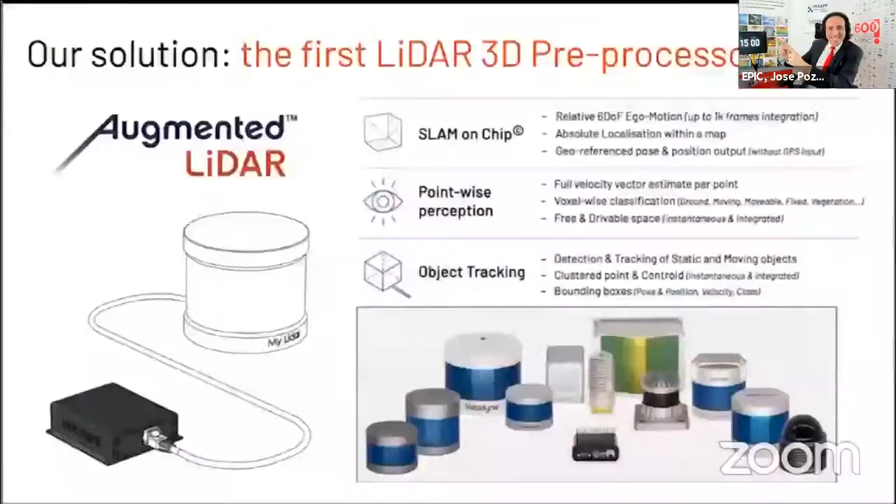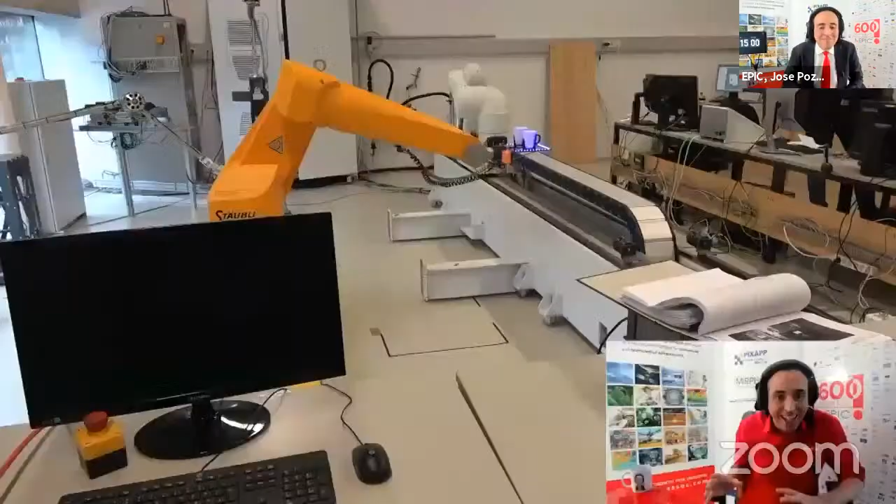Yes, we had several epic meetings looking at what sensors could do for robotics. Some great companies have come forward to say what has to happen over the next 3 years, but we can do so much more this year. Seeing from the perspective of the robotic industry, it's all about precision and speed. Robots often need to observe things in motion and react with ultra-fast photonic speed.

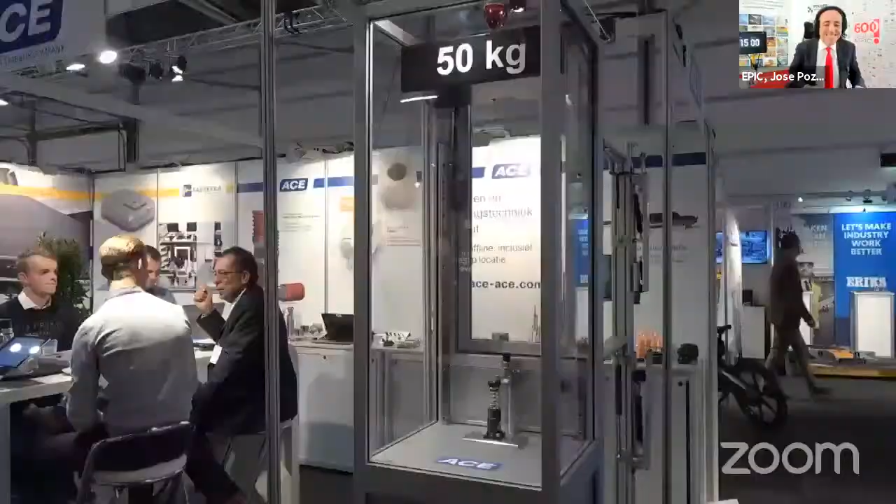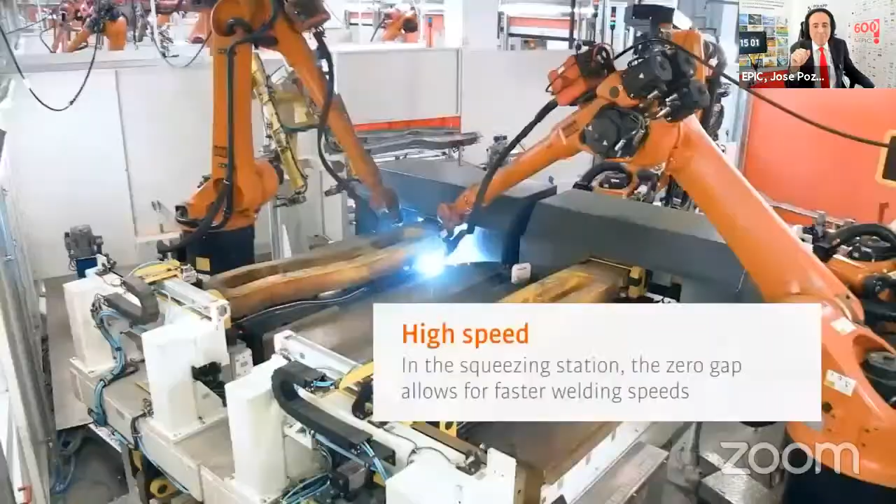I remember walking around precision tool exhibitions and thinking, suppose that robot arm from ABB was equipped with 3D sensing, or what could German giant KUKA do for the automotive sector if smart hyperspectral cameras were included? In our meeting on the 1st of February, why don't we ask DEMCON about their vision needs in robotics and then match them with the cameras of Roboception.

Look at this. Stereo cameras remind me of one of the most glorious sci-fi movies of the 80s. Check out my VIP list: Epson or Yaskawa in Semicon, TransEnterix in medical, Boston Dynamics in security, or Amazon in logistics. So let's connect with robotic companies on February 1st at 3 p.m. Sign up for the Zoom room or watch live or later at the Epic YouTube channel.

I was acting at the end of the video. I am never tired, I don't sleep, I only live out of photonics. It was really a lot of work, a lot of work from Dr. Francesca Moglia to put together such a list of companies.

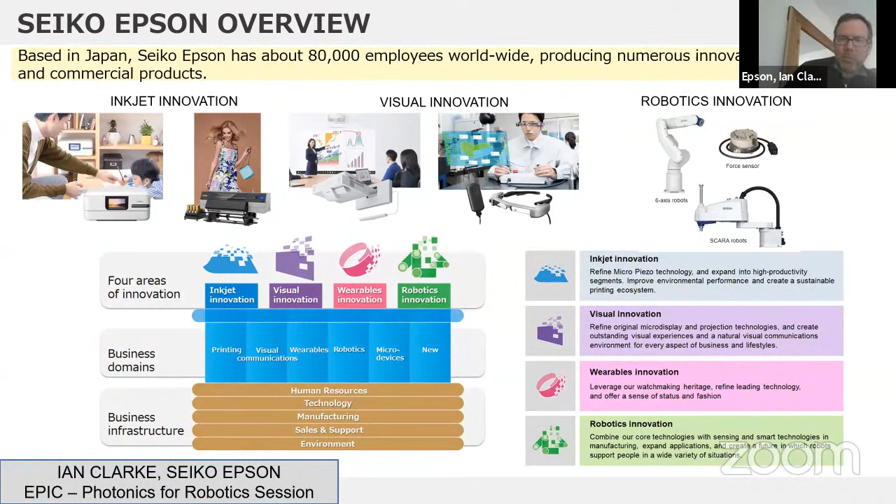So R&D in Toronto - we're mainly on the software side, and of course, as is trendy and fashionable, working a lot with machine learning, machine vision, and adding those sort of skills to the robot line. We're basically focused on industrial applications, that's Epson's main area right now. But on the R&D side, we're trying to look beyond that. And I thought for today, with the European Photonics Industry Consortium, it would be best to talk about how we want to use the skills going forward to try and create some new value.

So basically what we're focusing on in this particular area is to add a lot of sensors, mainly vision sensors, but force sensors as well. And of course, machine learning to try and expand what one might say a robot can do to more of a skilled concept.

So the main idea here is that as opposed to just being able to detect one object and then manipulate that object and perform one task of one particular type, we want to train the robot to have a skill in that sort of area, so it can detect and manipulate and perform tasks of a variety or of a decent variability. Basically trying to expand the concept of hard coding the robot to do one particular thing, to it having a skill in grasping and manipulation, whether it be pick and place or pick and insert or any task that you might want.

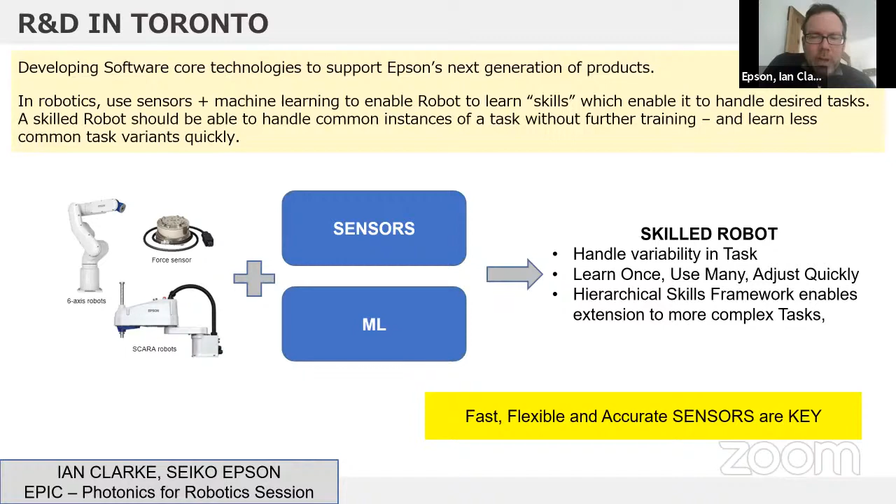But the idea is to build up the robotic skills to open up new possibilities. The idea with this is that you want to train the skill at design time so that you can then apply that skill in many different applications, and be able to adjust quickly for particular environments or skills or tasks required at the customer site. And of course, as is the main point today, the key to all that is fast, flexible, and accurate sensors. So that's what I wanted to talk a little bit about, what our needs are in this area.

So currently, we're using a lot of RGB, RGBD, 3D cameras, both on the robot arm and also statically mounted. And of course, that leads to a real variety of conditions, angles that things are being viewed at, environments that are being viewed from. And that leads to a very high bar for what we really want out of the sensors that we're using. Of course, we want to be able to control the light sources that we're using.

It'd be nice to be able to control the projected pattern for the 3D cameras, to be able to tune that pattern to the specific environment and object that we're doing. Accuracy - a lot of times the 3D cameras that we've seen are tested on more of a flat surface. But at the end of the day, what we really want are the edges and the corners, to be able to preserve the 3D shape that we're looking at, both the smoothness of the shape, the 2D, 3D edges. We also need to be able to preserve the holes, the complexity of a shape that we're looking at.

And to help with all this, we'd like to be able to support reinforcement learning and machine learning policies on the hardware of the camera for speed reasons. Probably the one thing I'd like to dwell on a little bit more today is the interface - meaning we see a lot of literature, a lot of products offering sort of auto-tuning solutions and the ability to tune, but in the end, the level at which we can do the auto-tuning, can we be able to specify target features like edges or holes or things that we say we want to be able to see this or see that?

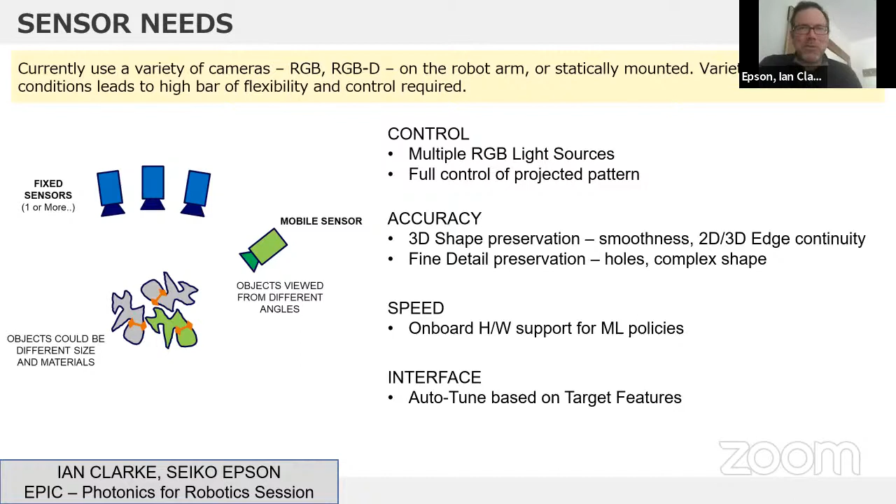And with that, I think my time is probably pretty much up. So I apologize for the very speedy and brief overview, but I'll leave it there. Thank you very much for allowing me to give this brief overview of what we're doing in the Toronto office, and I look forward to talking with you.

Thank you. Thanks a lot, Ian. That was exactly what we asked for, you put also your wish list. That is good. Maybe it's not really detailed, because what's interesting for us is you mentioned what you have so far isn't satisfying you completely. Can you give a more specific example of what is not really working properly that you'd like addressed for the future?

Yeah, we'd like not just a solution for today, but a solution to think about for tomorrow too. Good choices.

So, to talk a bit more about what's not working for us today: most of the things come down to, as we know, starting to look at it from a 3D perspective. So with a mobile camera, you're looking at it from different angles. Of course there's reflectance and lighting, all the usual problems that come up, and how to dynamically adjust to that.

But the main thing is, when we're doing the auto-tuning, as opposed to having an expert say okay, this is what I'm looking for, this is how to tune it, we want to be able to automatically learn that based on what the task or algorithm downstream is looking for. So a higher level of...

...semantic meaning. So if I want to look for edges or specific features, can I specify that and say, here's what I want to see in the scene? Can the camera system then adjust and tune to that? In other words, the interface between the algorithm, the application, and the sensor—could we have a slightly richer, higher level interface between those two components?

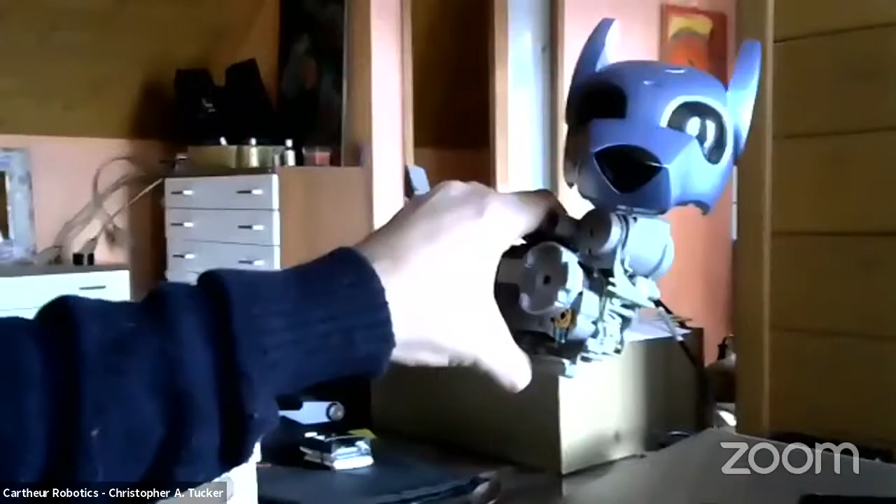Oh, can you move the camera? Oh yeah, I guess I will. Over here, I can't even see what I'm doing now. Yeah, show us. There, we got some parts over here, maybe you guys recognize what that is. Oh my god, I'm a huge Isaac Asimov fan. These guys, whenever I... this is one of the people developing the personalities. Where's the camera going? Oh my god. Well, there's stuff everywhere, I'm quite a mess, but the wife seems to tolerate it.

Christopher, on your YouTube channel you talk with your robots, that's something I really admire. When we are here looking to connect software with robotics companies and enable photonics technologies, there are many companies who will want to follow with you. I just want to say welcome to this, please continue asking questions, and thank you for being here. I'm a fan, thank you very much.

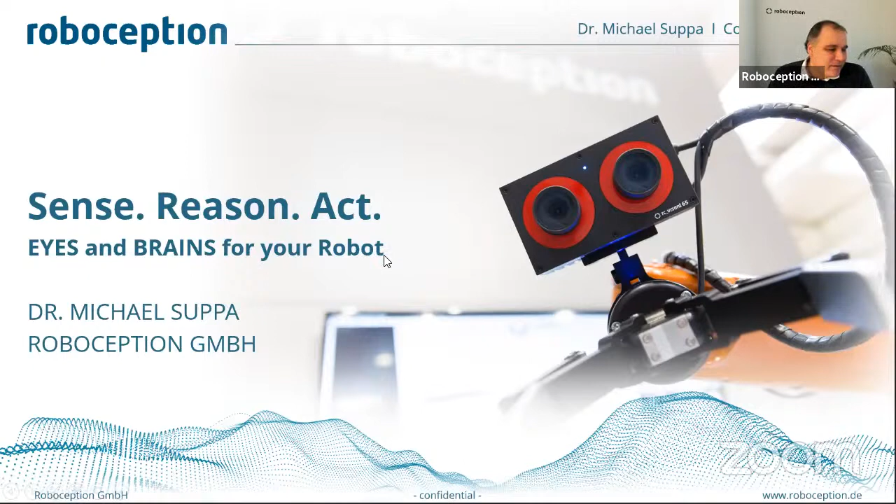Basically, what is our challenge? In most industrial production, for now, we have standard approaches. We have the world ideally known, and the robots doing the same things all the time. But most people are looking at the moment for versatile plants, so basically they want varying products, varying processes. It can be that the human is interfering, so work pieces are at different positions. And somehow the robot has to be able to perceive that.

And this is where we are proposing that 3D vision, mostly stereo imaging, really helps in combination with machine learning and applied AI to solve this flexible task, because only 3D vision gives you the scale that you need when you have varying workpiece to robot and end effector positions. Usually that's the question here. And the task we are talking about, especially in logistics where you have no knowledge about the objects, and in machine tending, which can be on a mobile base or with a stationary robot, you always have to refer the robot to the workpiece, to the workstation. This is what can be done with 3D vision.

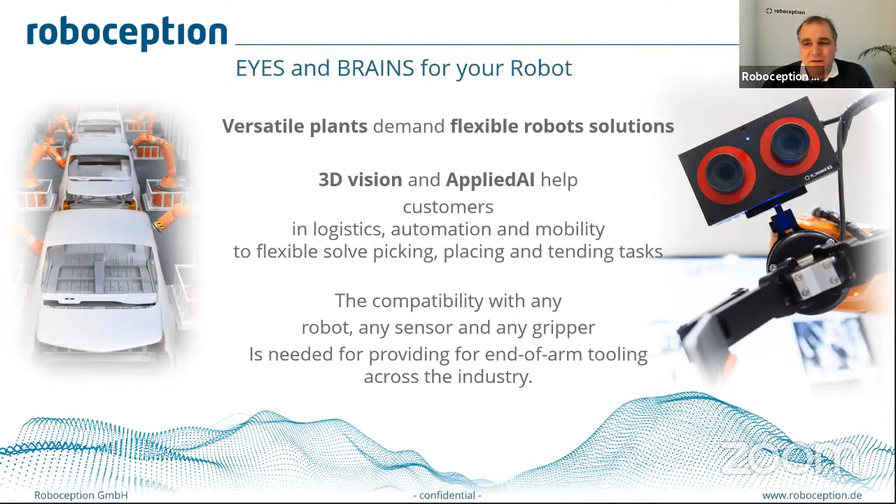In addition to that, you have a multiple variety of robots on the one hand, and a lot of grippers. And the task, same as for the human, is actually solved in between the eye and the hand. The question is, how do we really get this eye-to-hand relation for multiple tools and multiple robots? This is what I will introduce a little bit in the following.

It was nice that Ian mentioned it. He said he wanted to compute something on the camera, and this is what we are actually offering. Our stereo-based system includes an NVIDIA GPU, so we can actually run algorithms on board of the camera that really reduces the latency, because we are directly coupled to the camera chips on our system. So the rc_visard, you can see here, comes at two different baselines. Usually from a stereo system, the baseline decides the optimal distance in between the camera and the workpiece.

We are offering two versions for mounting it on the robot, with small baseline and wider baseline, as well as mounting it as an external camera. You can compute on board, and what we usually deliver to customers is not the image but the object location, the grasp point, and other high-level information, because we can compute everything in between on board of our camera.

So we have the possibility to detect AprilTags, QR codes. We have a SLAM module for mobile systems. Item Pick is a tool for logistics where you know nothing about the objects to pick, just that it's in a mixed bin and you have to find it with your suction device. Box Pick is for palletizing and depalletizing, and Silhouette Match and CAD Match are for machine tending, because in machine tending you need an accurate placement position.

In logistics, it's pick and drop, so you need to know an unknown part, pick it, place it and drop it. For industrial automation, you usually have an exact CAD model of the part, and you need to place it accurately. On top of that, we use machine learning to give us generality.

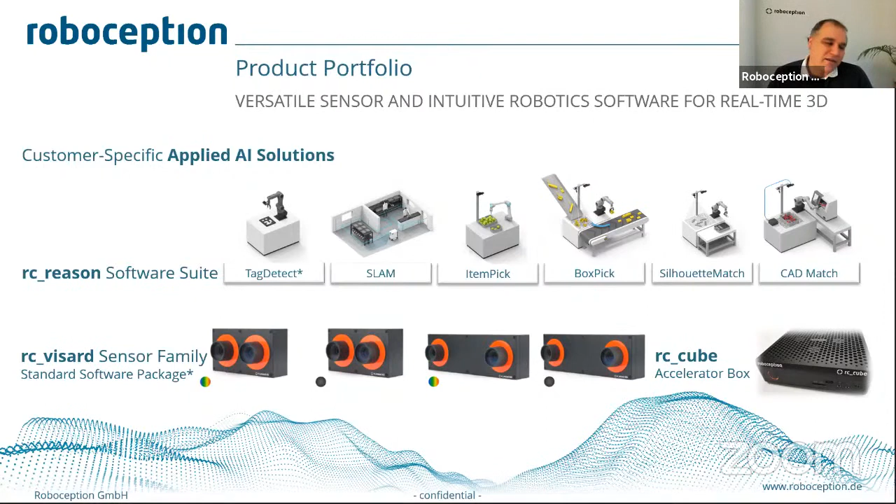The accuracy in our case comes from classical algorithms, edge refinement, and so on. The large variety of objects, or the large amount of parameters we want to reduce, we usually tackle with machine learning approaches. In this case, we fulfill both generality and accuracy, and that's the specialty we do in our product here. So we are solving a variety of applications—I just want to give you an overview.

We are not really in the automotive industry, we are in general industry. So we have challenges in reverse engineering of architectural parts. We have logistics applications where we get millions of parts that we don't know anything about before we have to pick them. Then it's machine tending parts for varying lot sizes, from 1 piece to 100 pieces.

We also did some applications in the leather industry, where the challenge is that human markings have to be read and interpreted by the machine to be processed automatically, which is also a topic that happens very often. And of course, mobile robotics.

Our approach is that the customer has a very easy to use, intuitive web GUI, because usually our customers are not vision experts. So all the technology behind it has to be presented in a way that a roboticist, which is not the same as a vision expert, has the capability to deal with and set up the system. So it's about setting it up and working with it—this is the challenge we face here with our products.

The key challenges we still face are the variety of objects, and also the robustness for specific applications in logistics, where parts often have difficult material properties—reflecting surfaces, shiny surfaces. That is the key issue. And of course, cycle time: in logistics you have to put about 1,000 items per hour, which requires vision to be below 1 second always, and this is a big challenge we have here.

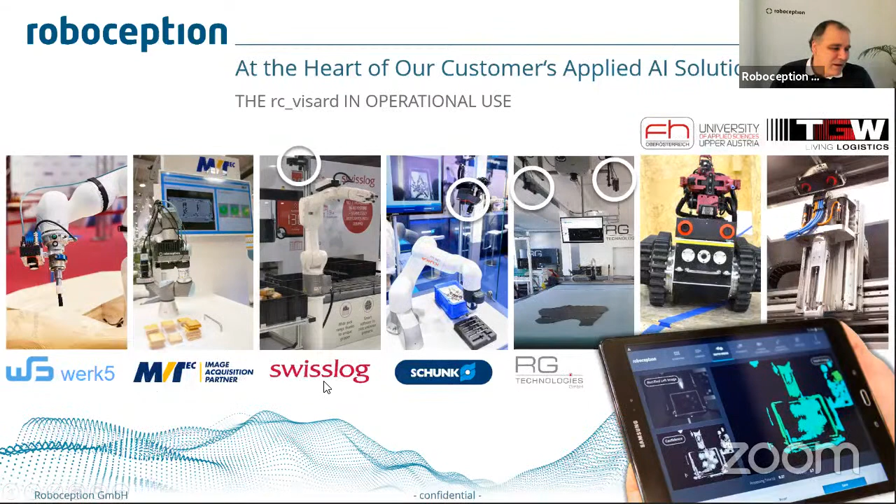So we really have to process fast and have limited knowledge about the objects we are dealing with. This is basically the challenge I want to pose today for the sensor community, the robotics community, and the vision people in the group. Thank you very much for your attention and for giving me the opportunity to speak. You have my contact data here, and I'm happy to answer any questions.

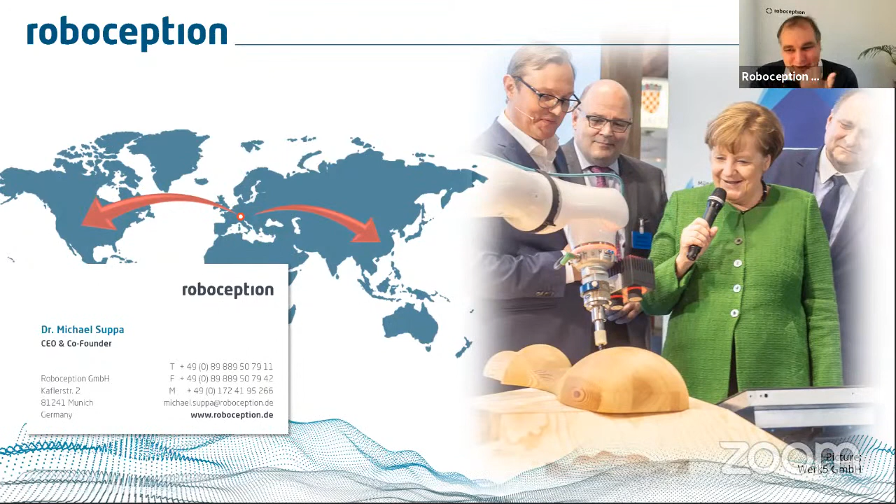Well, I have a question—who is the lady in the green dress next to you? I think she's ending her duty in September this year, but she's a physicist, so I think it was a good idea to have her in the call here.

Thank you very much for a fantastic presentation. It's really great that you are here. You have caught the eye of many companies in this industry, and we are really looking forward to helping you be even greater. The first question comes from me—then we'll go to Jabil and Intel, but the first one comes from me. This is a collaboration meeting; this is what we do for a living, keeping companies together.

What can you do for the 670 members of EPIC? And most important, what can they do for you? This is the EPIC question.

Great question. So first, what can we do for them? Basically, we can help them solve perception problems in their production, in their environment, and so on. That's our key effort, especially if you're in logistics, industrial automation, or lab automation. This is where we work in these domains to help you automate your production and solve interesting perception tasks. That's what we can do for you. Now, what can you do for us?

We are developing software and hardware. We are mostly focused on stereo systems, but we are also interested in collaboration with other hardware manufacturers of different sensing principles, where maybe our software may fit, or the other way around. So we are a bit flexible on that.

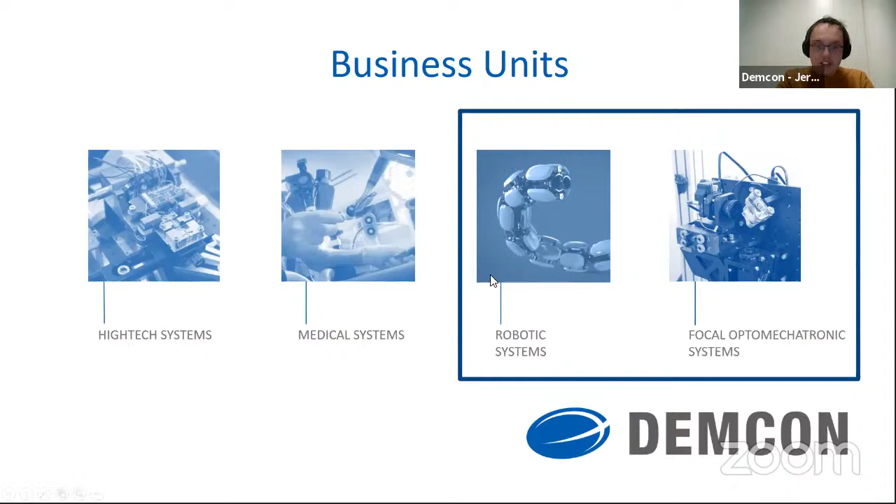So what I've been working on at DEMCON for a couple of years now, first for my master thesis, and then currently as an engineer as well together with other people, is DEMCON's sensor fusion framework that we've been developing. The challenge that we see in the industry is that for different kinds of robotic systems that we as DEMCON are developing, being it drones or pipeline inspection robots, you have to combine different sensors to estimate a robot's position and orientation, and also to be aware of the surrounding, the mapping. That's basically the problem of SLAM, simultaneous localization and mapping.

What we see is that for every kind of robot, being it a driving car, a rover unit, a drone, or a pipeline inspection robot, you need different types of sensors. They really depend on the situation that the robot is operating in, and what the ideal setup is. So we at DEMCON have been developing a sensor fusion framework where we can combine all these inputs, being it wheel odometry and IMU, LiDAR using laser techniques, or stereo cameras, and also including April tags and other kinds of sensors, even Wi-Fi measurements and range bearing measurements, to come up with a robot's environment and position. And the idea is that we can do this for every type of robot.

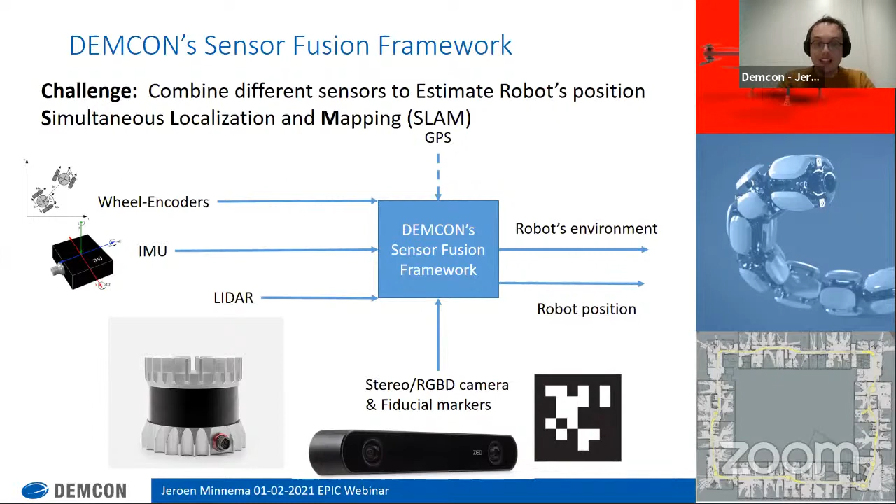And that's also how we've been approaching this problem from the start. So we've been developing a framework that can combine all these types of sensors. What we can do is combine the advantages of all the specific sensors to tailor them to the system that we're working in.

And I want to share with you an example of a pipeline inspection robot that we've been developing. The idea of this robot is kind of a snake with several different modules. Especially right now I want to focus on the head, because it has a camera and also a laser finder to detect its surroundings. But the thing is, this robot has to be operating in a large pipeline network where it has no GPS or anything, but it still has to be aware of its position.

And we can combine the information that we know beforehand of where joints are, or cross sections or T-joints or whatever. We can combine this information in order to basically locate the robot under pretty difficult circumstances, because the wheels experience slip, but we can compensate that using an IMU and using the camera to detect, to use basically computer vision and also AI to do this.

The cool thing about this robot is that we trained it beforehand, before it even went into the pipeline network. We generated artificial data, synthetic data using our efforts in AI, to train the robot in detecting those joints. As you can see, it matches quite well with reality, and we can use this to detect the joint and train the robot to navigate before it even entered the pipeline network.

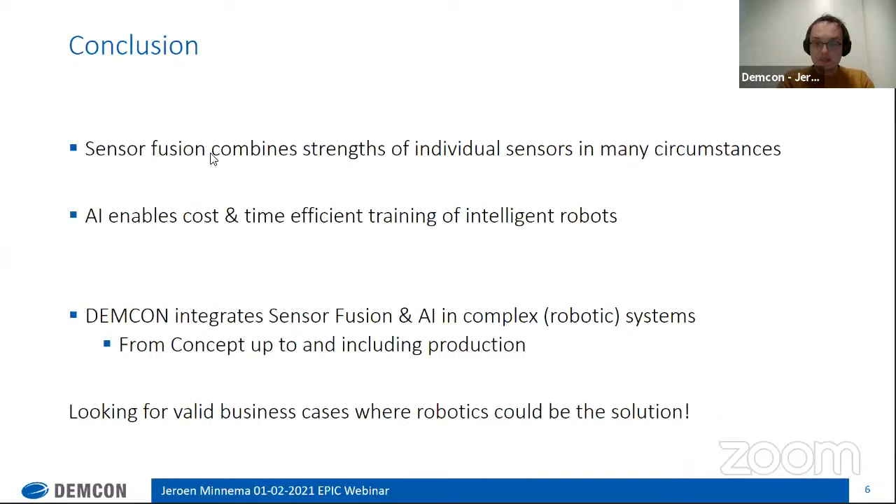Thanks a lot, Jeroen, for your contribution. Very interesting. You're welcome. It's always very challenging with DEMCON, because I know you always do OEM special products, and you do a lot in-house. But here we want to hear also what your supply chain can do for you. Is there someone in this room who could help you and collaborate to specialize your robots, both software and hardware? You're free to pick up some of the things that you prefer.

Yeah, well, at the end, the performance of this SLAM, or basically our entire sensor fusion framework, depends on the performance of the sensors to begin with. Better stereo vision, a better LiDAR, or better photonic systems, better hardware definitely improves the performance of the system. So if you start with better sensors, your results will also be better. That's my answer to the question. We're always looking for better hardware to improve this, because the context the robot works in during pipeline inspection is pretty difficult. You need the best sensors to begin with, and a very strong software setup, otherwise you won't manage.

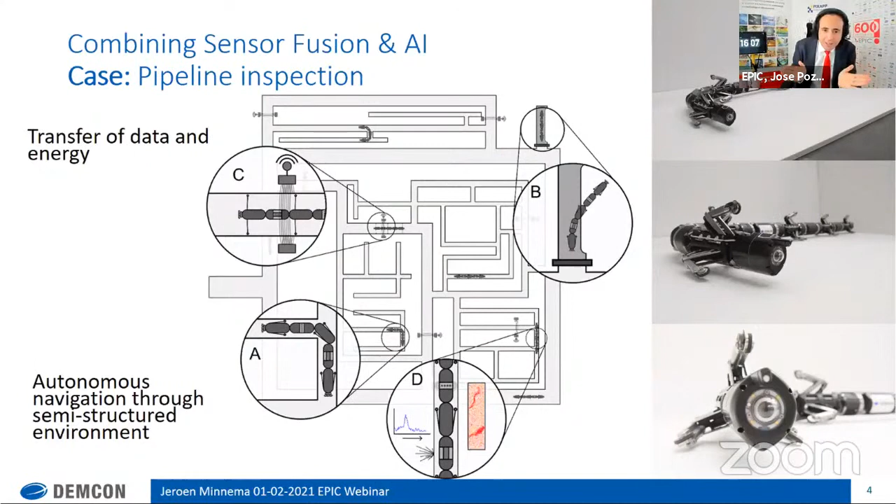There is no light, so here we're actually inspecting something in the dark, and you want passive imaging, right? You want to avoid having a laser in there, taking into account that you don't know the material you're going to be facing. Yeah, that's also true.

Basically, the problem is also that the robot has no GPS, so localization is a difficult thing. That's also where optical systems come in handy, because only using an IMU and odometry wheel information would not be enough. You really need the vision capabilities to keep track of where you are.

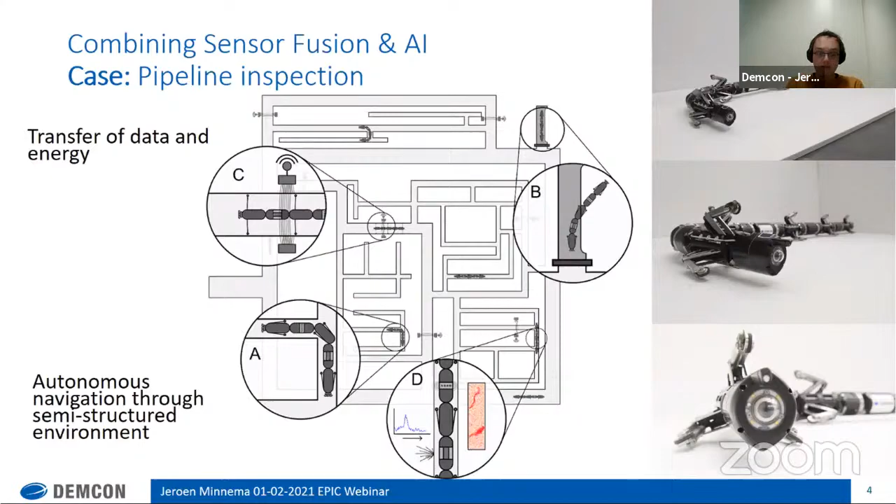One thing I always wonder when I see systems like this, which I love, is the wavelength you want to use for the passive imaging. Some people will say infrared, but we are talking about pipes that get really warm sometimes, and it is very hard to know the temperature, so infrared could be out of the question.

When you're talking about doing a low light camera, is there any particular technology you have in mind? I'm sure this is a challenge and many companies would like to cooperate on this.

Yeah, I can only say that this is still a challenge, and we've also been experimenting with different things. Indeed, you raise a very valid point that infrared is difficult. It's a difficult question actually, and we've been experimenting with different setups. Sometimes you can generate your own light, we've also been trying that. It partly solves the problem.

What we've also been using regarding localization is that some points do have light, and we can detect those to see that we are there. We can use them as a kind of checkpoint, like exits for instance, and then generate some light to detect those points. So that also helps us.

Thank you very much for that. I think there is a lot of room for cooperation here, and I will make a lot of introductions for you to talk about this. But I want to know from Michael, because your company, Roboception, has already been addressed a couple of times, and you are the link here between different companies. Michael, this is a challenge: we are talking about going inside the pipes, not knowing the temperature and conditions, with very little light. Is there any particular room for cooperation here?

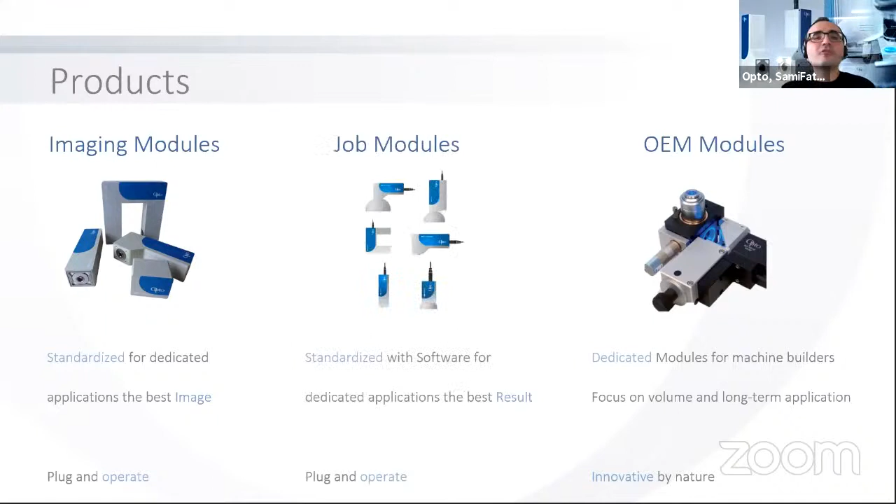So these are the two main parts. And we start working on what we call job modules, which, instead of providing the best image, provide the best result. So it's really dedicated to one task or another, based on processing, based on artificial intelligence when required, to provide the result for, as I said, mainly machine builders.

As I mentioned previously as well, we have a strong focus in biomedical markets, and especially life science. We have a strong knowledge about fluorescence imaging, and especially multi-fluorescence imaging, where we have developed quite a lot of skills and know-how these last years.

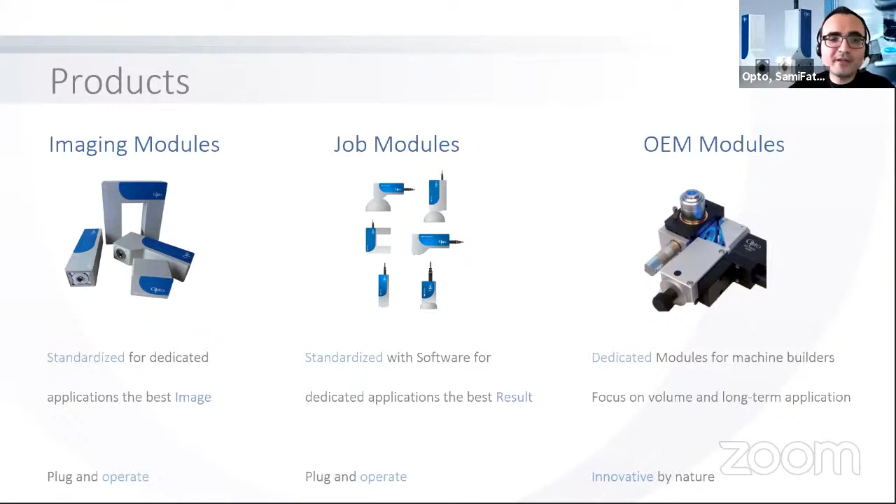When it comes to robotics, I would say just an example of a project we have been working on - that was a project in collaboration with the University of Würzburg. It's a research project, and the goal is to work very roughly on being able to make customized, patient-customized medicines, because it was around mucoviscidose.

I don't know if that's the English word for that disease. Typically it's a disease for which some medicines and drugs exist, but it's a combination of many different products, and very expensive. As far as I understood, it could be like many thousand euros a year of drugs, whereas the efficiency really depends on the patient. So the idea of this research project was to be able to make a biopsy, to make tissue engineering, and to multiply all the testings to evaluate different combinations of drugs.

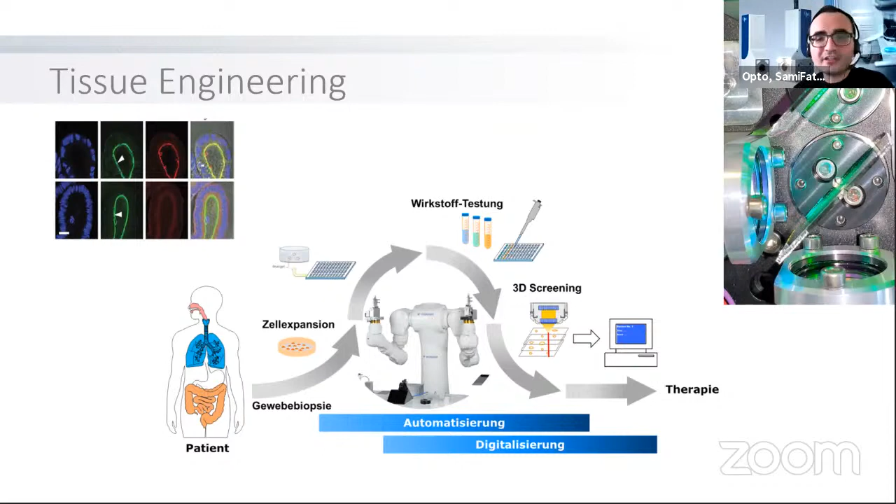So what we can propose, let's say, to Photonics, or to EPIC members, is systems for optical systems that can bring machine vision to Photonics, especially in the microscopy scale, with strong automation.

And we have some experience also together with robotics companies that we would like to improve, maybe more on a larger scale, but I'm pretty sure there is some room for robotics in association with microscopy. What can EPIC and EPIC members do, how can you help us?

Of course, we are evaluating and integrating different technologies into our modules, looking for many technologies every day that bring a lot of innovations. And of course, we are really interested in getting new products, new technologies that could be integrated in our products.

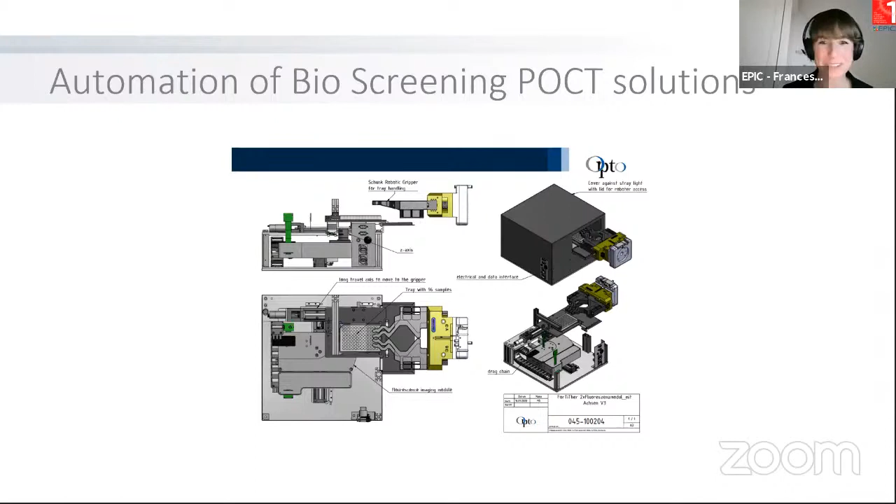So now going back a bit, you already mentioned what the EPIC members here and the whole audience can do. Maybe we get a bit more specific on some details. If we think about what we mentioned before, for example, you need a lot of reliability and also to be fast. Maybe this is not what you have in medicine, because you want more accuracy, but not necessarily a fast process. Is that the case? So what exactly is the challenge that Photonics should support you with?

Actually, I would say one of the challenges currently, especially for multifluorescence, is finding the right components. It could be lights as well as image sensors that enable us to make a tight system, and one of our key points when we deal with customers' requests is to make something that integrates easily into a whole system, into a machine, and enables a good throughput.

And fluorescence, indeed, usually we are in processes that are not about 100 milliseconds, but fluorescence is in many cases, at least in biomedical application, a low light application where we have to expose a lot. And this is actually the same also in the semiconductor industry, when you have to go beyond 1000 nanometers to inspect wafers. Having a proper sensor that enables us to reduce exposure time is a key point.

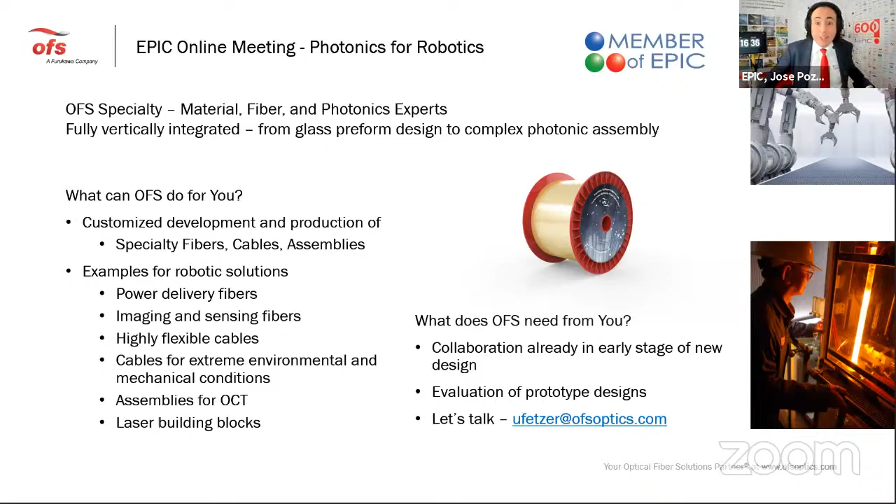Thank you very much, Udo. And this is one of the key companies we have in EPIC in the fiber solution. So for any fiber requirement, please contact Udo.

I'm going to reach now one of my favorite parts of this meeting. You know, my favorite part of the meeting is to talk about LiDAR, because everybody who knows me knows how much I love LiDAR. And when it comes to matching robotics and LiDAR, we always have the problem to know what are the unmet needs.

I have in the room, I think I do, Santiago Royo from Beamagine in Barcelona. Un abrazo, Santi.

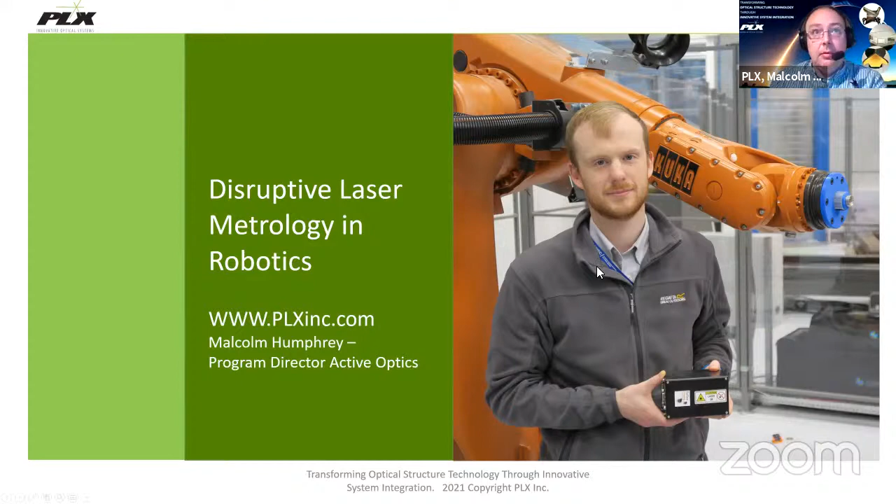So I just briefly wanted to run through who PLX are - probably a few of you have not heard of us as yet. A bit about MOST technology, the recent acquisition of Reflex Imaging Limited, and the new Active Optics division within PLX.

So PLX have been at the forefront of photonics since 1955. They produce high precision optical components using their proprietary manufacturing processes. The invention of the hollow retroreflector back in the 70s was really the path for us working with top military and mission critical projects.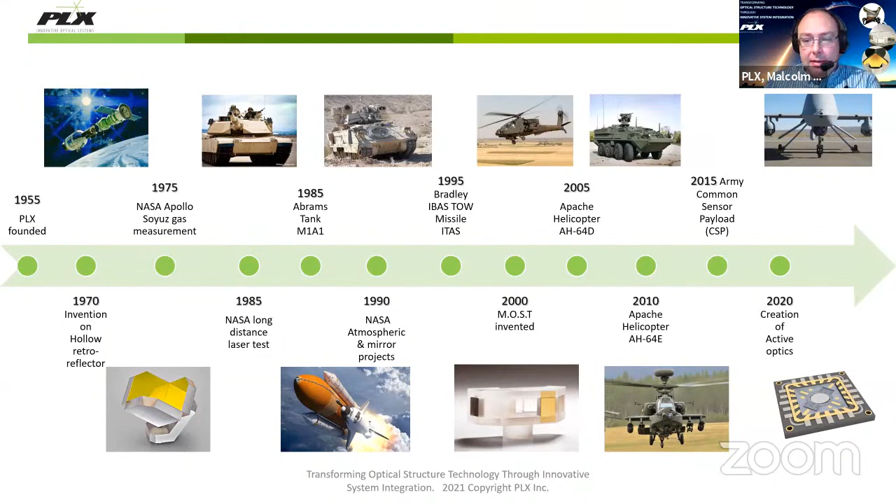So last year in December, as it happens, saw the acquisition of Reflex Imaging, and that has really allowed us to increase the capability of our products. For those not familiar with our MOST technology, it's our most popular technology at the moment - this is about integrating multiple optical elements into a single monolithic structure that enables high degrees of stability in harsh environments without any loss of accuracy.

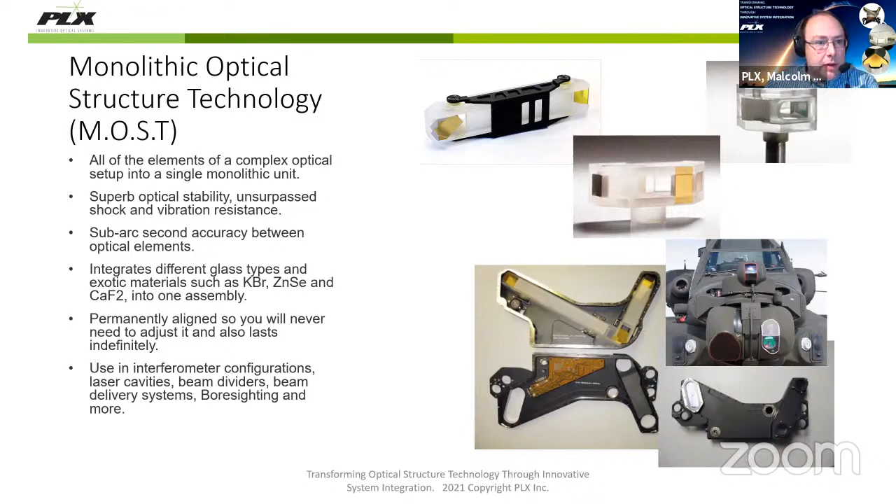As I mentioned, in December last year PLX acquired Reflex Imaging, who were my old startup company. This really started off with Reflex Imaging approaching PLX with regard to the MOST technology, and we wanted to use it for our upcoming O-LAMM metrology system. We very quickly found there's a lot of synergies between the companies, and that resulted in the acquisition of Reflex Imaging in December. This collaboration has already yielded some interesting new technologies, which we'll hopefully talk about in future meetings.

So the new Active Optics division is all about active optical devices, mainly based on MEMS devices. Anywhere we need accurate beam steering, scanning, or modulation, that's what we're all about.

An example of this is the former Reflex Imaging product, the LAMM device. Here's a bit of an overview: we have a diode laser with a circular laser profile, which is deflected onto a MEMS scanning mirror. This in turn deflects the laser in a linear scan pattern, so you see the various paths going out. When that goes out of the unit via this beam splitter and hits a retroreflector, we get a pulse of light back to the photosensor.

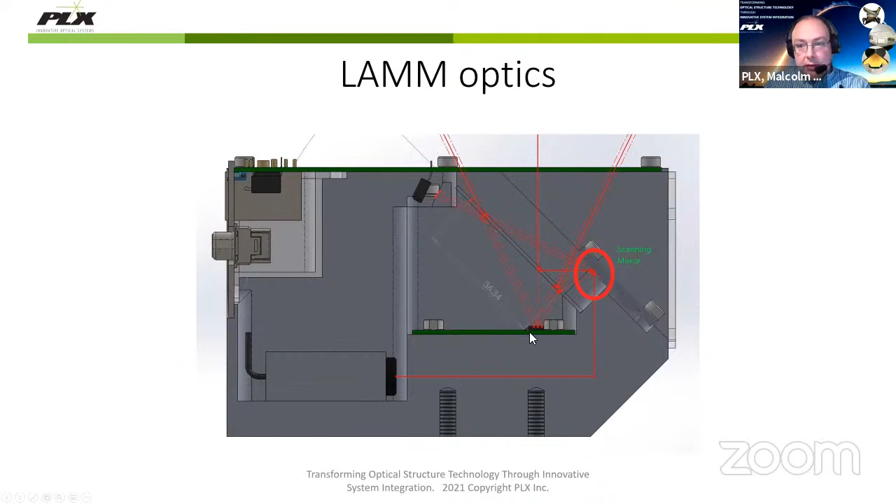So the way this works in practice, you would have the LAMM unit scanning a smart target, scanning it in a plane because it's a 1D device. Whenever the laser dot hits a retroreflector, we get a pulse of light back. We know the angle of the mirror at the time of the pulse, therefore we know the angle between the LAMM and the reflector. We know the geometry of the smart reflector, so we can work out the range, lateral position, and even using these two inner reflectors, we can work out the vertical position.

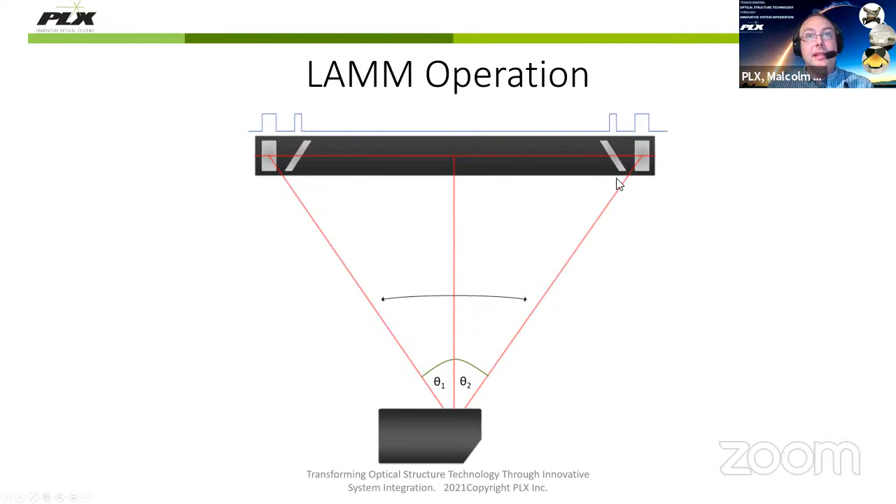We did some evaluations for this with the Advanced Manufacturing Research Centre here in the UK in Sheffield. We looked at two potential applications. The first was tracking the position of a robot end effector in real time using two LAMMs and a known geometry, scanning in a plane. This has applications where your workpiece is relatively planar, such as an aircraft fuselage or wing, where you need large volume metrology.

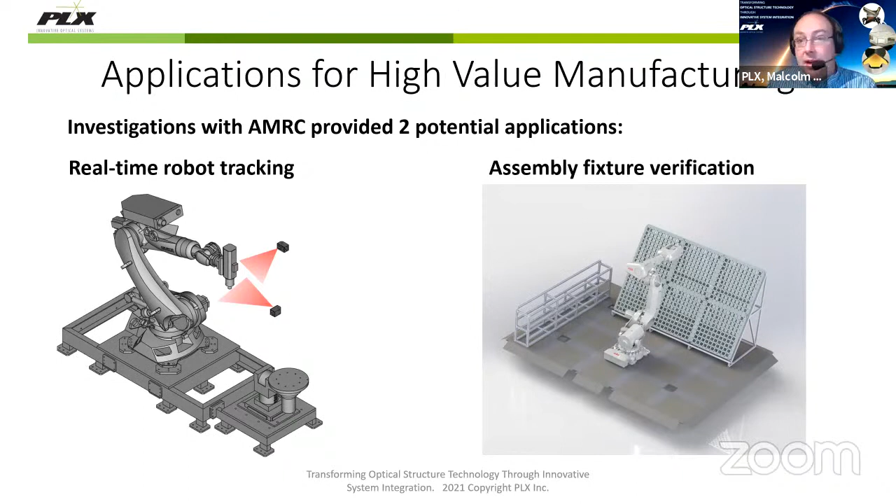Another application involves mounting the LAMM on a robot end effector, using the robot to scan the LAMM across a workpiece. In this case, it's a reconfigurable assembly jig. The robot would place clamps on the assembly jig, pick up the LAMM, scan where all the clamps are in relation to itself, and then start working on whatever task it needs to do on the assembly jig or workpiece.

As I mentioned before, we have an upcoming project called the O-LAMM. This is where we're taking the single dimension scan device and now scanning in a volume. This is really following feedback from many of our users as to what they would want to see in the LAMM product going forward.

A very brief comparison between the upcoming O-LAMM technology, which stands for orthogonal laser metrology module - I should have mentioned that earlier. Probably the headline figure is the sample rate of this device: we can sample up to 256 targets with a refresh rate of 500 Hertz on individual targets. We think that feature alone is pretty unique in the market.

Photogrammetry systems can do that with conventional cameras, but they're limited by the refresh rate, and more importantly, the latency in processing that image. The latency of our O-LAMM system is going to be very, very low because we're processing data on the fly and sending it to the host system on the fly.

Some features and benefits: accuracy is probably one of the big ones because we're using our novel technology and MEMS scanning mirrors, which are very stable devices anyway. We're seeing very good accuracy for these devices, hardly any drift - we haven't been able to measure any.

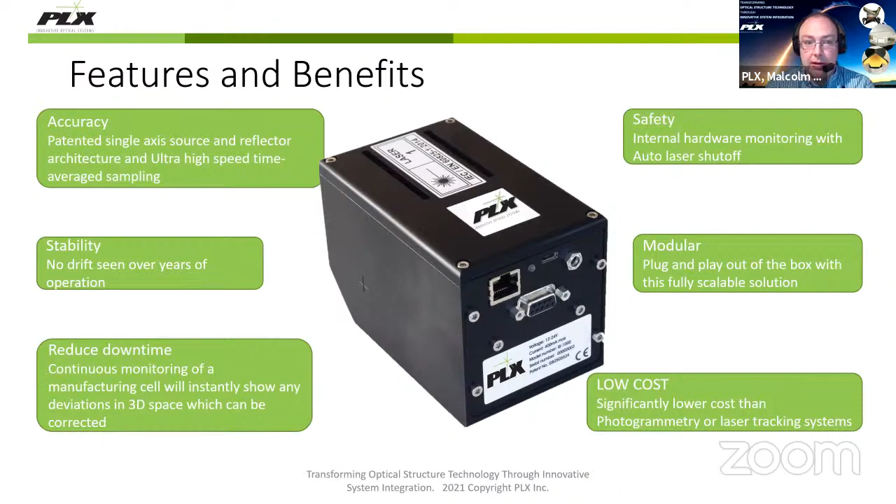What we're looking for is really some partners for this O-LAMM project, specifically robotic integrators to help us take the O-LAMM technology and turn it into an end product or full system, including all documentation, calibration tools, the systems, and integration into the robotic control systems. These are real-time devices, so we fully anticipate them being used for real-time robot control, and there'll also be opportunities for developing kit parts such as calibration and verification tools.

Finally, what we can offer is anywhere you need precision laser beam steering, scanning, or manipulation using MEMS devices - that's our expertise. Anything that's real-time processing, we can really help you with that.

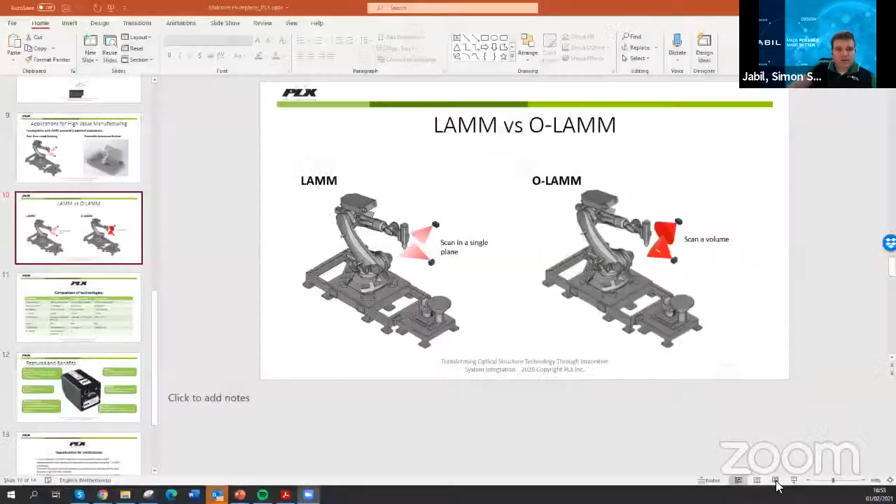But I'm going to get this out of the blue. Simon from Jabil, when you heard this presentation, what kind of opportunities do you see to integrate this O-LAMM system into robots? That was really an interesting talk right here. Thank you, Malcolm, for that. You're welcome. To be frank, I need to further understand, since you already highlighted that the system costs are extremely low, or that's at least what I understood.

And that would be a question, is that in a double-digit US dollar range, triple-digit? Can you narrow this down a little further? Sorry, the range of the device, did you - the cost range, you mentioned that. Oh, the cost range, sorry yeah. It's feasible to implement this in scale. Where are we approximately?

Absolutely. I mean, it's based on MEMS scanning mirror devices. These are commercial devices, they're pretty low cost. For low volumes, we're talking probably the cost of a car, a cheap car as an example. Obviously we would need to go through the process fully to actually come up with an end cost.

But we are aiming for a cost figure that is below photogrammetry systems, well below laser trackers, the high-end Leicas of this world - a fraction of the cost of those. We want this to be economically feasible to fit into your $80,000 robot without driving up the cost of the manufacturing cell. And of course, the higher the volume, the better the cost becomes, because we're looking at the efficiencies of mass production now.

Definitely, thank you for that. That helps me put this into perspective. And I asked Jose to put us in contact after the meeting.

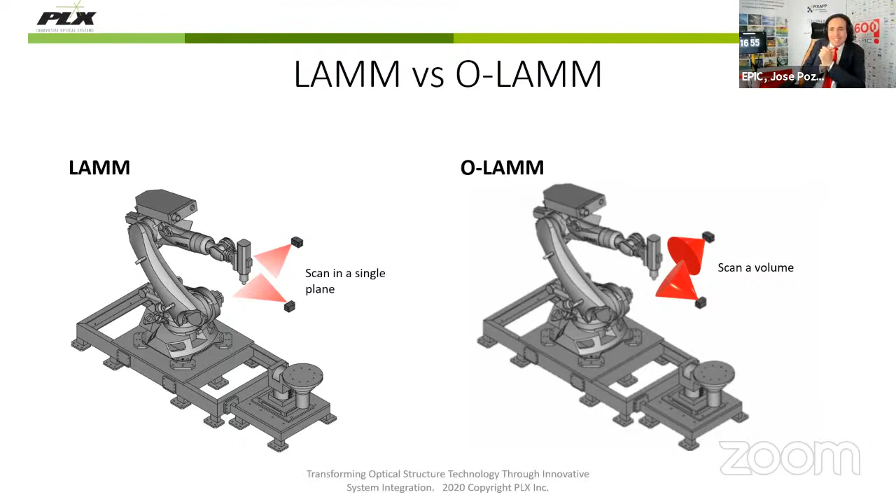Malcolm, I really love this slide, and I think it summarizes clearly what the O-LAMM is. You are trying to scan in volume. Yep. You are trying to approach this at 30 microns accuracy at 5 meters. That's it. It is awesome. It is great. Could you maybe share with us the challenge that you will have, for me to find the right company to help you on this? There are many, but you could point out the challenge.

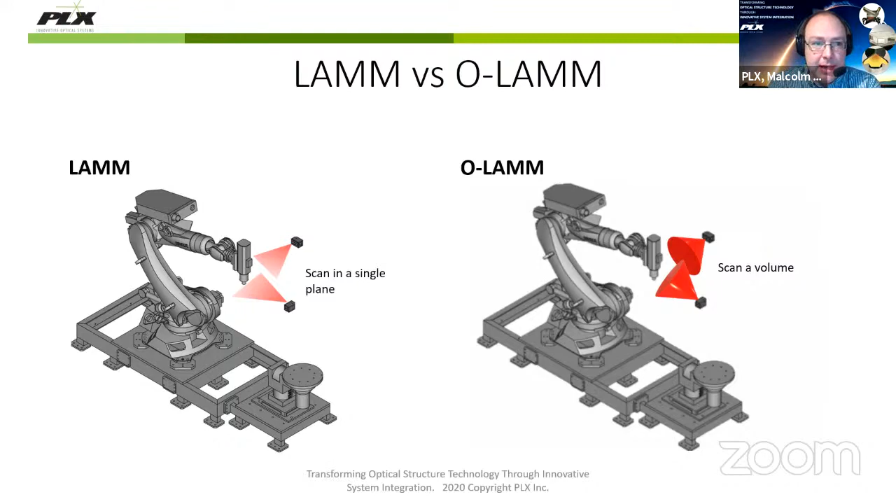Yeah, I mean, it would be great to work with perhaps another company that is developing this kind of technology as a partnership. One of the criticisms we had when we were Reflex Imaging is we were selling what was called a prototype product, if you like. So we didn't have the software to go with it, the integration into the robot control system, all of that - those things that are essential to creating a system that you can then go and sell to the Boeings and Rolls-Royce and Fords of these worlds.

We will find you companies working on that. But first, there's a question in the chat, it's coming from ABB Robotics. Jan, thank you very much for being with us today. What's on your mind? I was just thinking about the interface, because you mentioned you have higher bandwidth by far compared to other technologies, and how do you transfer it, and how is communication to the robot control?

So we can basically implement any interface that the user wants. What we have done with the existing LAMM products is we're using 100 megabit Ethernet with Modbus protocol. The latency then becomes about how well your network is performing rather than the LAMM device itself. Internally, we can output data very quickly within the device - it becomes more about limitations of your network. But as I said, if you've got a CAN bus, if you've got RS422 or RS485, we can absolutely interface to that.

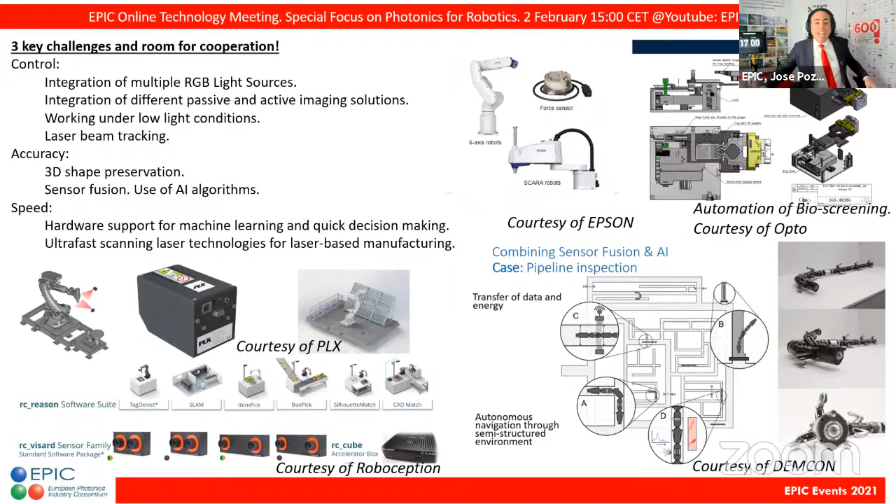It was really a great meeting. I really can't believe that over 2 hours we talked about so many different topics and scouted so many cooperations. Francesca keeps saying we only have 5 speakers, 6 minutes each - are we gonna fill 2 hours? And Francesca said, of course we're gonna fill 2 hours. We could have filled 20 hours.